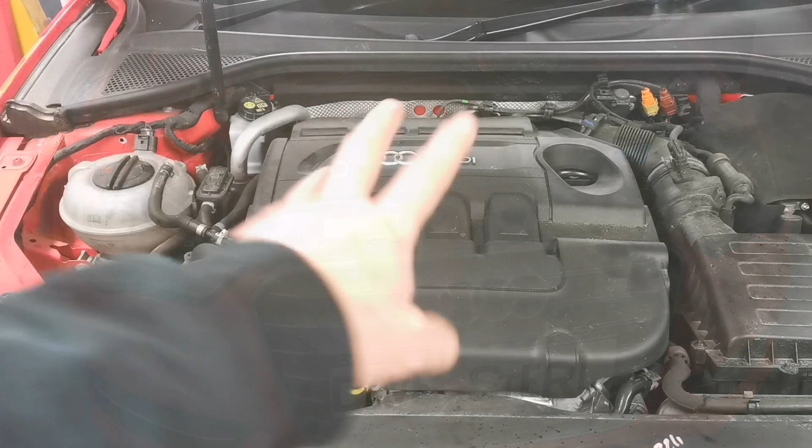2014 Audi 2-litre TDI. And in this video, I'm going to talk about the cooling system in these engines. And this is going to be the advice that I give all my customers with Volkswagen Group TDI engines and how it could save them a ton of money and a lot of hassle.

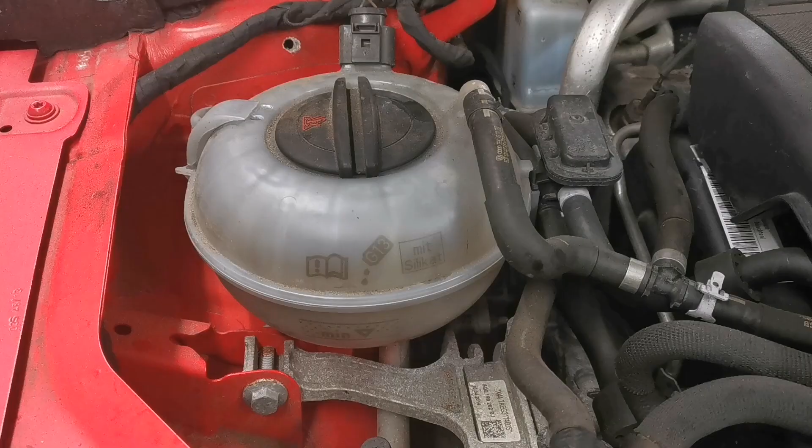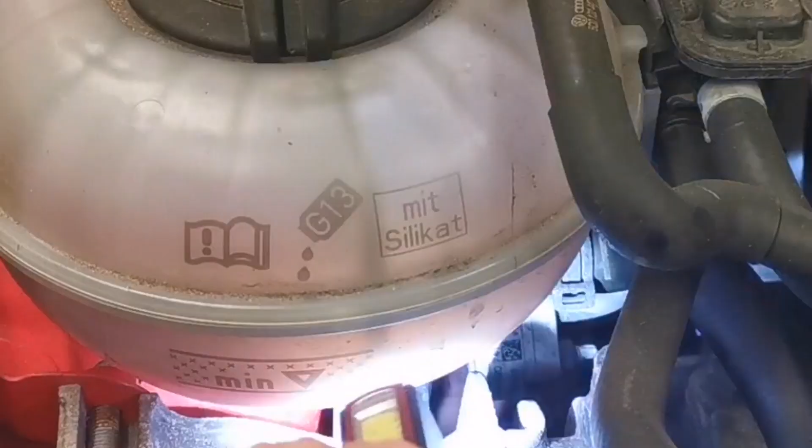So this particular engine in this car has this expansion bottle, and as we can see, there's a couple of German words written on it there. Mit Silikat, and that translated from German basically means with silica. So what that means is there is an additional bag of silica in this expansion bottle. Now I've already taken it out so that I can show you what it looks like and show you what to look for. What I tell customers, and I'd strongly advise them, is you remove that silica bag.

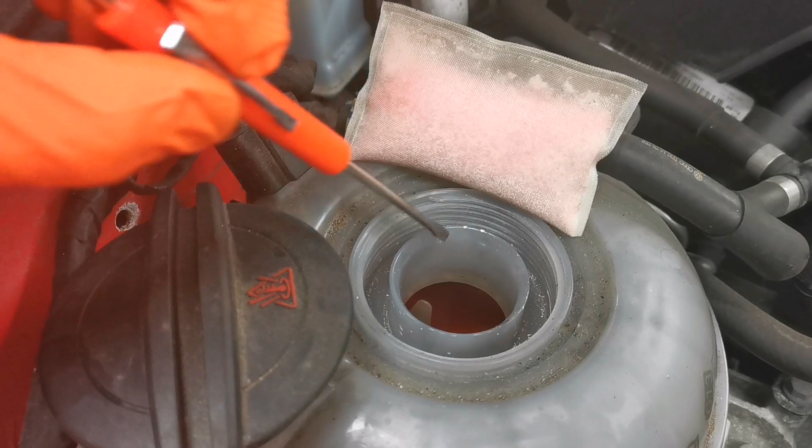So there it is. There is the silica bag that was inside this bottle. So where it usually sits is into the right hand side, so it's sort of in there. If you look in, you can see this is the level sensor, and you see two wee prongs, but in there, into the right hand side, you can see the corners of this wee bag here, and this is full of silica gel. So with a hook tool and a pair of long nose pliers, you can get this bag out of here.

Now, it is quite sort of rigid. It's like a nylon bag there, with the silica granules in it. So what they're doing here, as you saw on the bottle, it said G13. So the G13 coolant that's in these cars is an environmentally friendly, low emissions coolant, and there isn't enough silica in it. So this is a silica additive that they've put into the reservoir there.

So yeah, you can see it. This has been out a wee while and it's dried off now. So obviously when you pull this out, it'll be all wet, and you can just about get it out from the hole there without having to disconnect any hoses or anything. So obviously, if you're going to do that, you want to take care. You don't want to rip this.

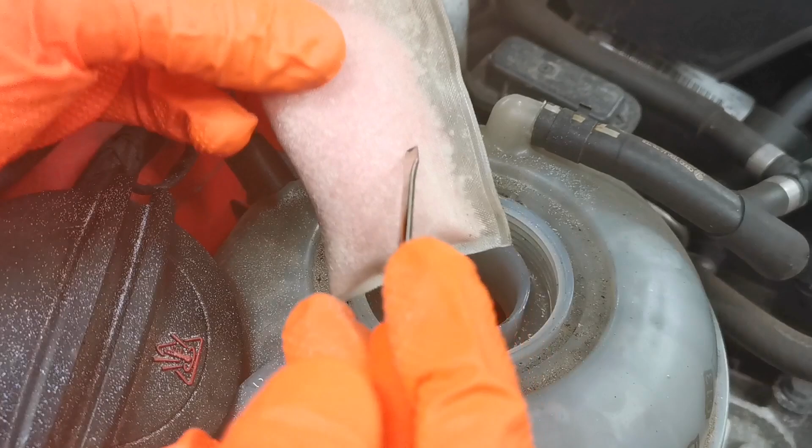If you find that this bag has punctured, and we have had occasions where we've found that this bag is split, these silica granules mix in with the coolant and they dissolve in the coolant. And why we want to remove this bag is that if that silica gets in with the coolant and the bag is split, that basically blocks up the coolant system, and you have a hell of a problem getting that flushed out. And it's a real pain. So much so, Volkswagen Group actually sell a flushing machine for this very problem.

So okay, why do I have additional silica in it in the first place? As I said, it's because the G13 is an environmentally friendly coolant which doesn't have enough silica in it. So they put this additive into it to help that, and there are other reasons as well. So this particular engine is a CRB engine there.

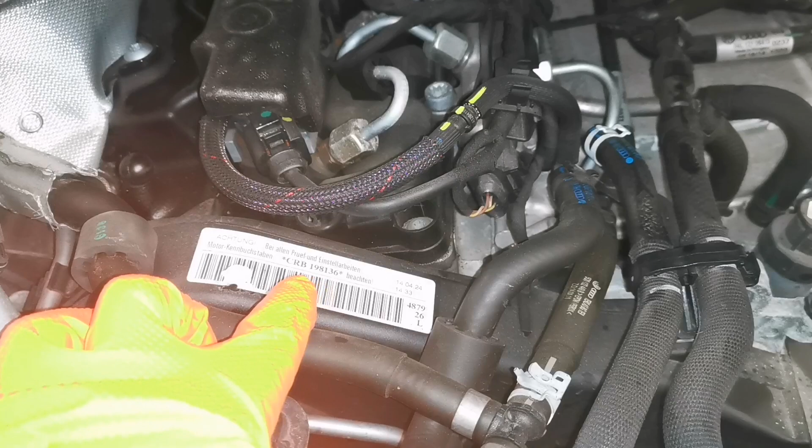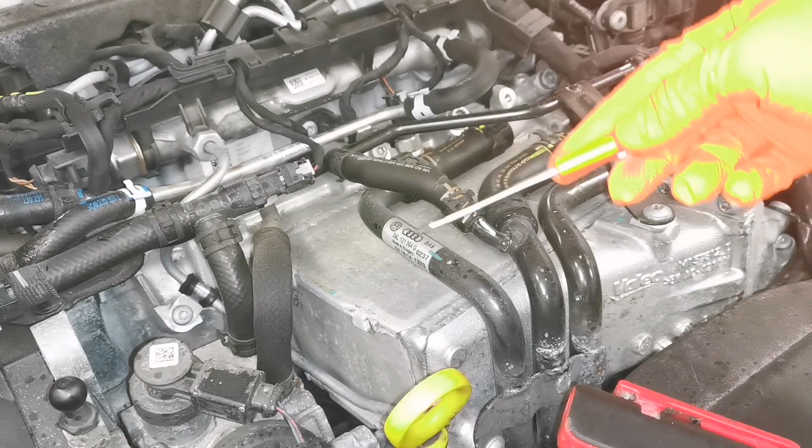So the water pump is driven from the timing belt, and I'll just get that engine cover out of the way there. And what we can see over here in the top corner is there's an awful lot of aluminium about this engine. This particular engine has a massive big block of aluminium as the intake manifold, and that's cooled with all these coolant pipes. So it's a very elaborate cooling system. There is the mechanical water pump that is driven off the timing belt, and there are also an additional 2 electric pumps.

Now, I've done a video in the past where I've shown the schematic of that system and the complexity of it. So the idea is it gets up the temperature very quickly. There are other factors. There is an electric heater in it as well, which I'm going to show you. And we'll talk a wee bit more about the coolant system. This vehicle here has a switchable water pump, and we'll show you how you can identify that.

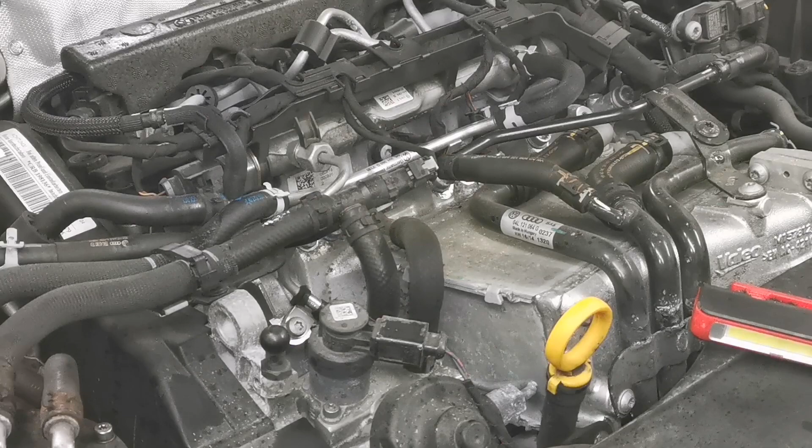So having a wee look around this engine bay, you can sort of tell what you have without having to look up engine codes or anything like that. So these engines that tend to have a lot of aluminium components tend to have the G13 with the additional silica bag. Now, I'm saying to remove that silica bag because there is a serious risk of that bag deteriorating and splitting, and that basically blocks the coolant system up.

And the first sign of that usually is the heater matrix in the cabin. You get no heat from it, and we're going to talk a wee bit more about that as well. But the first sign of that is no heat in the cabin, heater matrix is blocked. And if you go ahead and just put a new heater matrix in it, it's going to block up again.

If this bag here is split, your coolant system is contaminated. So G13, I'm basically going to read a comment that I made on a previous video, and I have it here. G13 is glycerin based, made from biodiesel, environmentally friendly. The traditional G12 is ethylene glycol. The G13 has silica additives in it to prevent corrosion to aluminium radiators, etc.

And I wrote there, my understanding is additional silica bag if the car has extensive aluminium, i.e. intakes, etc. G12 and G13 are miscible, but the long life aspect and corrosion protection are reduced. So what I'm saying there is if you revert to G12 and put G12 in this, it's not as long lasting and clearly not as environmentally friendly and emissions friendly as the G13.

So I just took a screenshot of that comment I made on a video 10 months ago. That was Russell Duncan, and that was my reply. And we'll just get that out of the way, and as you notice, every time I handle that silica bag, I put gloves on, because silica is poisonous. Coolant is poisonous in itself, but you get that stuff in your fingernails, and it's really nasty.

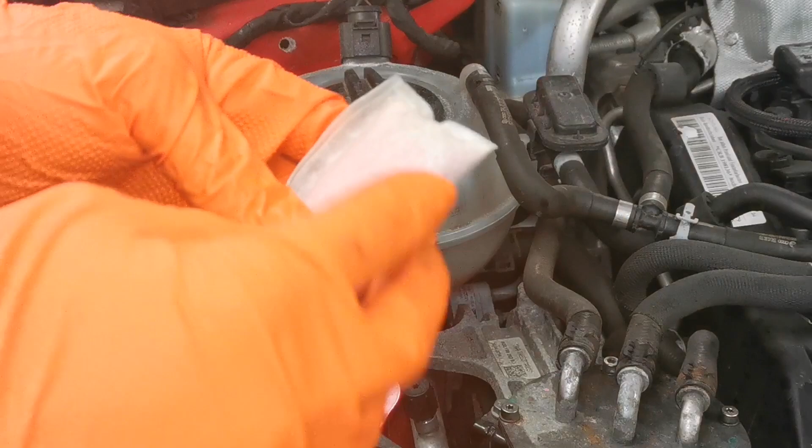Now, just to clarify, if it does not say mit Silikat on the bottle, I would go as far as to say you will not have this tea bag thing inside this bottle. It's only if you have that writing on it, but you could well have G13 in it. As long as that bag isn't in it, you're okay. Just keep the G13 in it and you're grand. So you can have G13 with no additional bag. I've seen that loads of times as well.

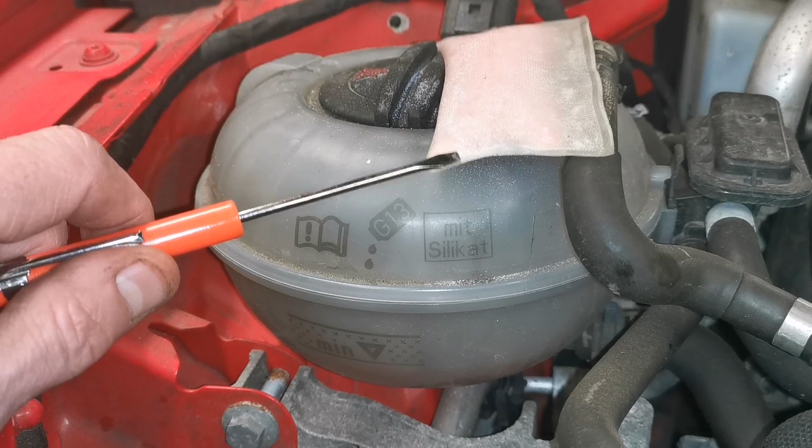But if you see this badge here, mit Silikat, written on this expansion bottle, my advice is to very gingerly take this bag out. Extract it through the top hole there, and as you can see, it's perforated. It's like a big tea bag. So I'm okay with running this car with the G13 in it, and as you can see, it needs a bit of a top up. I will be topping this up with G12 because the G12 and the G13 are miscible, which is a fancy word which just means mixable.

Of course, this is not what Volkswagen Group tell you to do. This is just my opinion. You can change this back to G12 if you want, and of course you can keep that bag in it if it's your preference. However, my logic is that the consequences of this system failing are a lot less with this bag not there. So keeping the G13, I'm quite happy to do that.

It's a perfectly plausible question from Russell there, of course. Should we keep the G13? Should we revert back to G12 when we remove the bag? That's your preference, basically. At the end of the day, I'm okay with keeping the G13 in it. But what I'm doing here is weighing up the risk of severe, expensive repairs over keeping that thing in there, knowing that it gives these serious problems. So weigh it up between having a real disaster on your hands with this cooling system and just running it with G13. It's sort of up to yourself. I'm just telling you what I think.

I've also done a few videos on the channel, and you can look through the channel list if you want. This is a switchable water pump, and yes, it creates a lot of questions and comments about the cooling system. This is the dreaded switchable water pump. It's driven off the back of the timing belt, so there's no teeth there, it's off the flat side of the timing belt. And this sleeve then goes over the impeller and basically switches the pump off.

Now it still spins, it still rotates off the timing belt, but because this sleeve is over the impeller, it does not force the coolant around it. Now, because this is quite a complicated cooling system, and as I said, it has two electric pumps as well.

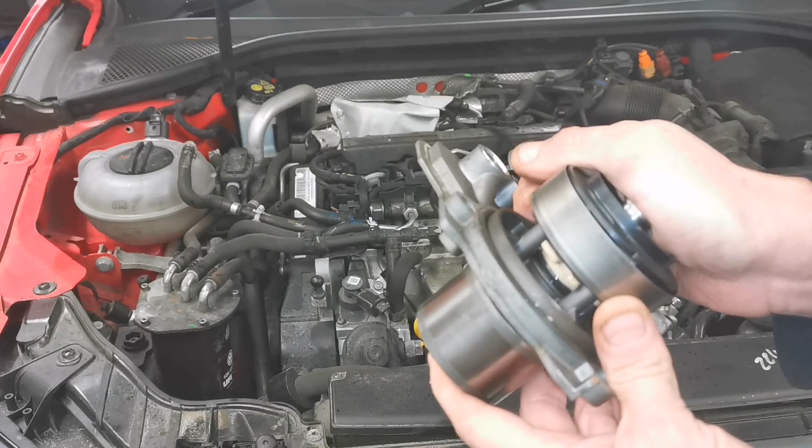You know, an overheat condition doesn't really manifest itself, and the typical symptom of this sleeve sticking, which this just sticks firmly. I've freed this sleeve up, but this was a failed unit. So when I got this at first, this thing was jammed solid, and it took a lot of WD-40 and a lot of putting air pressure in there to get this thing to chooch and free up. So it works now all right, but there's no way that I'm going to put that in the car.

But anyway, the symptom of this sleeve sticking is that when you're driving along the motorway, when you're in sort of cruise mode and you're driving at like 70 miles an hour, the temperature gauge raises way up, and you get an overheat condition. It goes above the normal sort of 12 o'clock or 90 degree centigrade normal temperature condition.

So how can anybody tell that they have one of these switchable water pumps in this car? Now this particular one, there's a piece missing here because it's swapped over onto the original car that this came off. It's not off this car. And this particular one, there's a multi-plug, a wire connector goes onto here, which actuates this, and that goes off the back and is underneath the inlet manifold.

In this particular car, the car that this pump came off, it had a plastic, normal sort of style inlet manifold there, and not this big elaborate aluminium thing. But in this, because this is a 2 litre, we can tell very, very easily if this engine here has a switchable water pump.

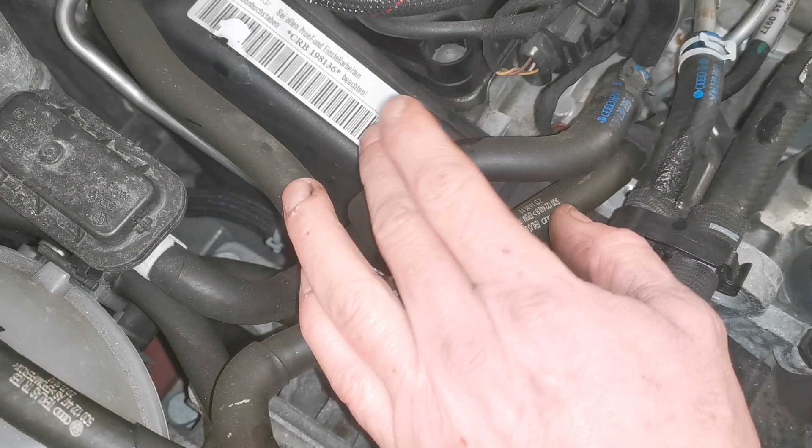If we look to the rear of the timing belt cover, so that's the timing belt cover there, we see this brown plug, and that is the connection for the switchable water pump, which is in here. So if you see that brown plug, you know you've got a switchable water pump in this thing. And that's it, just a different angle there. That's it in there underneath this. There's the diesel return pipe here, or one of them, and there's that brown plug there.

So that's your timing belt casing. So the timing belt sits down in here, or the water pump will sit around this area here, down in there, and that's the connection to it that makes that sleeve go in and out.

Okay, moving on, and I'm going to talk about the opposite condition, not an overheat condition, and these are comments and questions that come from some of the thermostat videos that I have already shown on the channel. And this is a bit of information which comes from Volkswagen Audi themselves, and this pertains to if you have the condition where the car takes a long time to get up to temperature, and then when people are driving along, or they go down a hill, or they're just traveling along fairly slowly, and it's a cold day, the temperature gauge actually drops off and sort of fluctuates and moves about.

Now, this could be quite important. Most people would say, oh, you have a faulty thermostat. Your thermostat's stuck open, and the engine can't regulate the temperature and keep it stable. Well, this is a piece of information which is, in my opinion, like gold dust if you own one of these TDI engines. And here it is. I'm going to share it with you because I don't think this information is really that readily available. And here we are, and we'll try and get it in the shot for you.

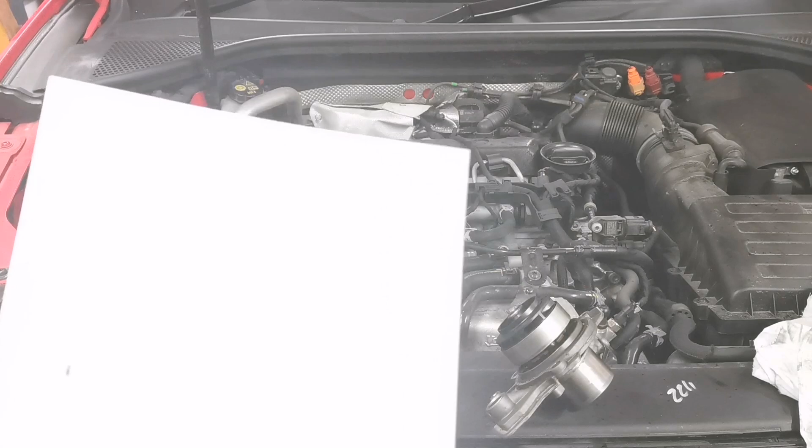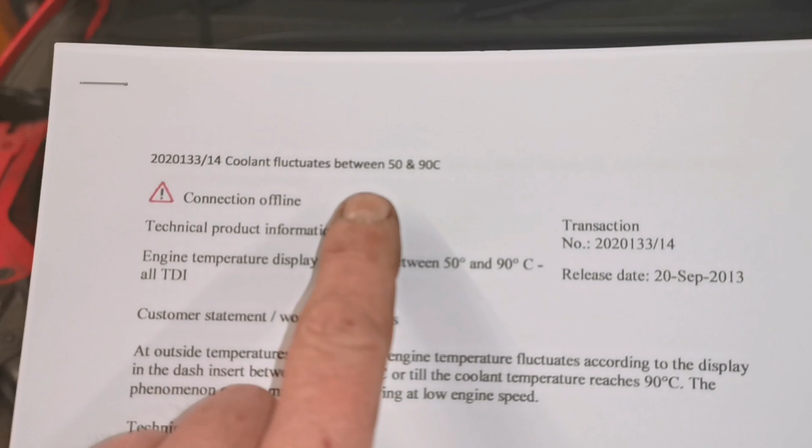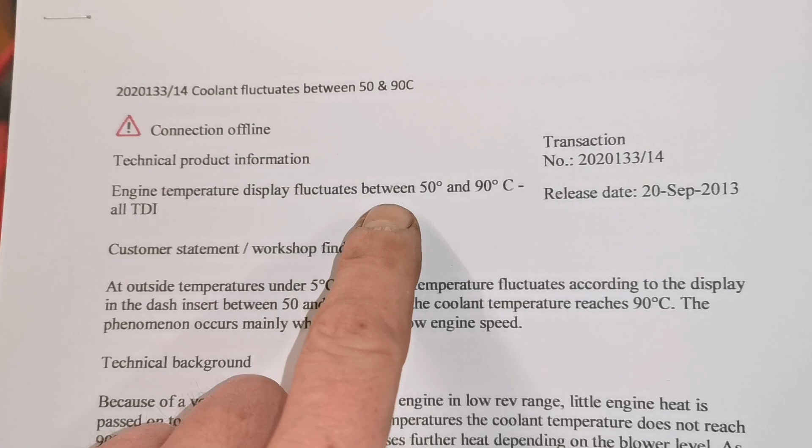So here we go. Customer complaint: coolant fluctuates between 50 and 90 degrees centigrade. Technical product information. Engine temperature display fluctuates between 50 and 90 degrees centigrade, all TDIs. So customer statement is at outside temperatures under 5 degrees centigrade.

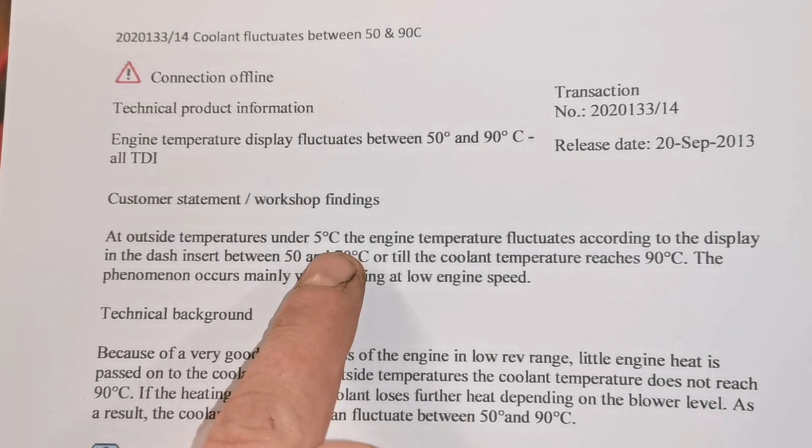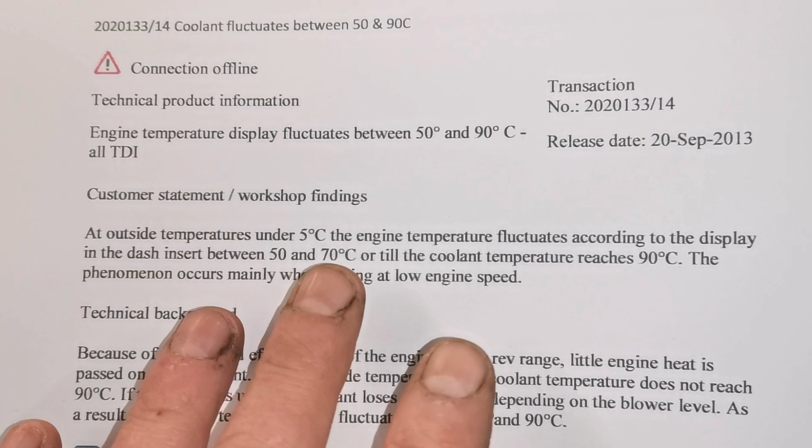So I'm getting asked this because it is winter time, and some parts of the United Kingdom have sub-zero temperatures at the minute, and it rarely gets anywhere near the 5 degrees. So people are seeing this, and I'm being asked about this. So this is the reason why I'm doing this video.

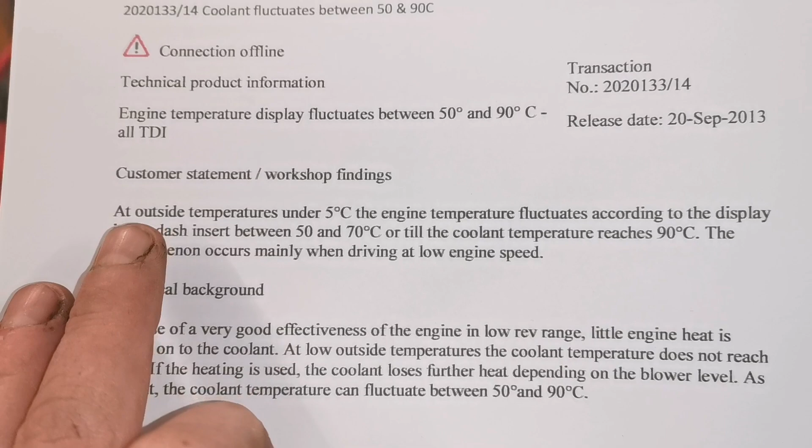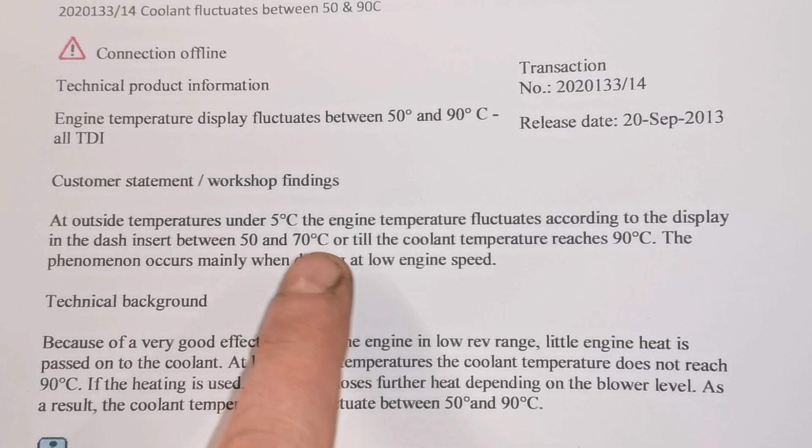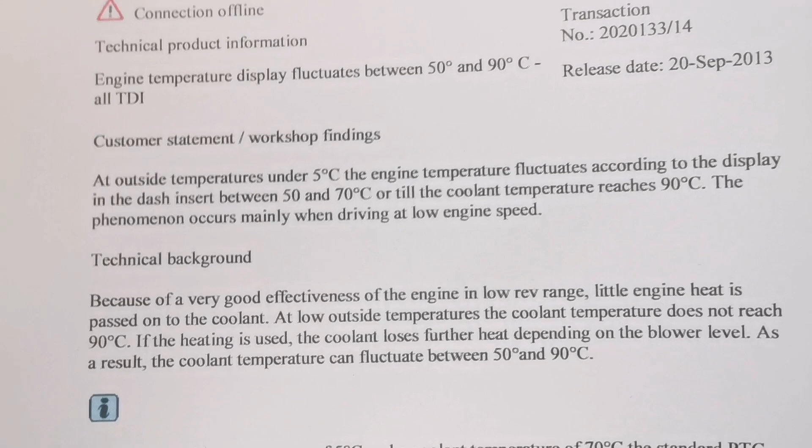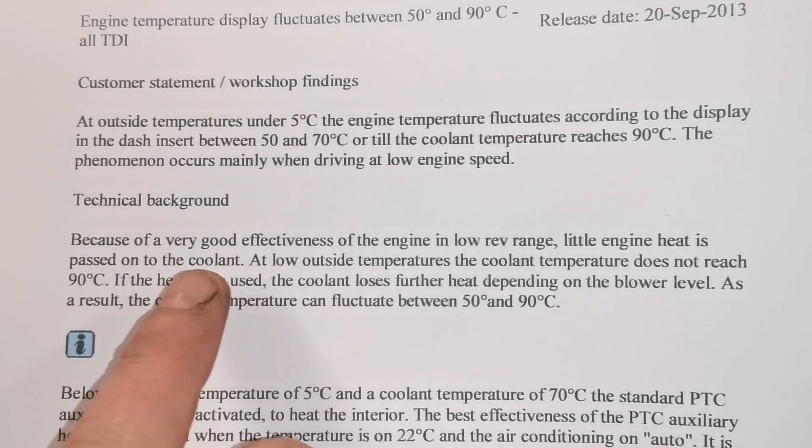At outside temperatures under 5 degrees centigrade, the engine temperature fluctuates according to the display in the dash between 50 and 70 degrees centigrade, or till the coolant temperature reaches 90 degrees centigrade. The phenomenon occurs mainly when driving at low engine speed. So here we go. Technical background. Because the engine's brilliant in a low rev range, little engine heat is passed on to the coolant. At low outside temperatures, the coolant temperature does not reach 90 degrees centigrade.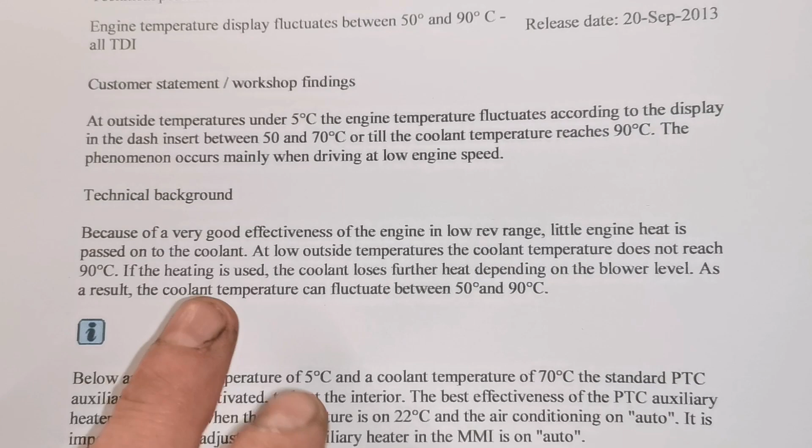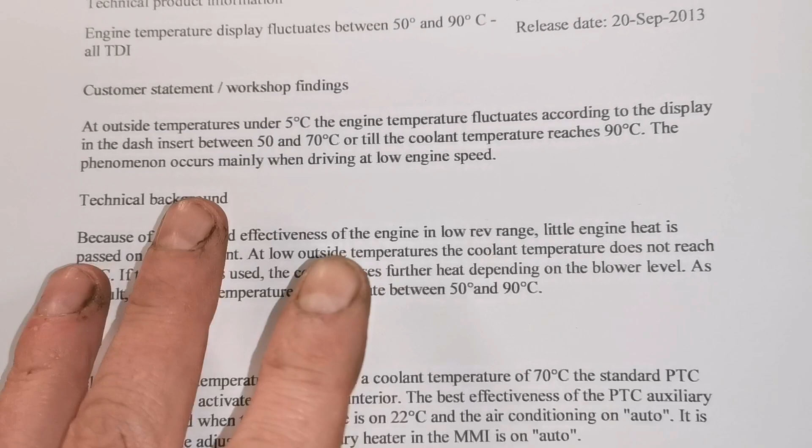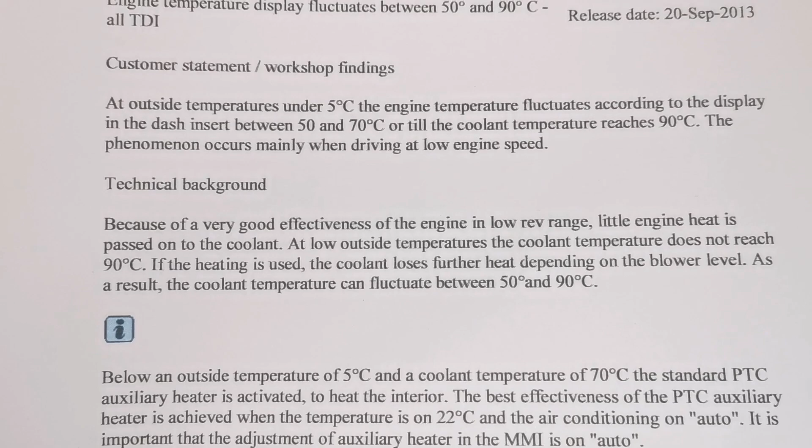If the heating is used, so that's the heating in the cabin, the coolant loses further heat depending on the blower level. So if you have the blower on full blast to demist the windows or whatever, it just saps the heat out of the coolant. So the heater matrix then acts as a radiator. Well, it is a radiator, so it cools it down. So as a result, the coolant temperature can fluctuate between 50 and 90 degrees. And here's the thing. Let me see.

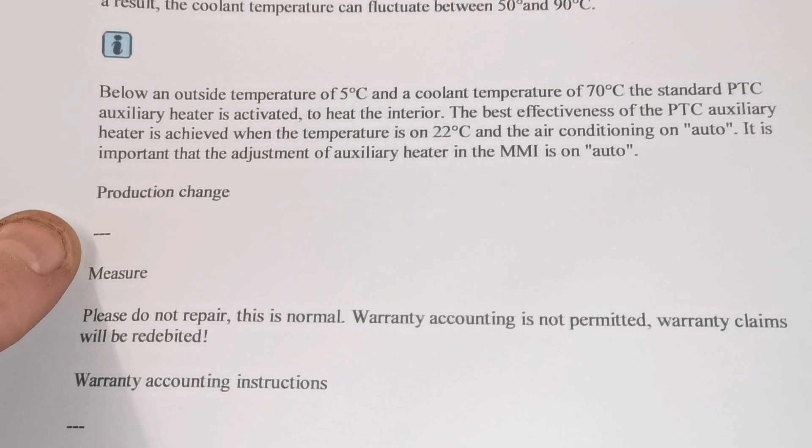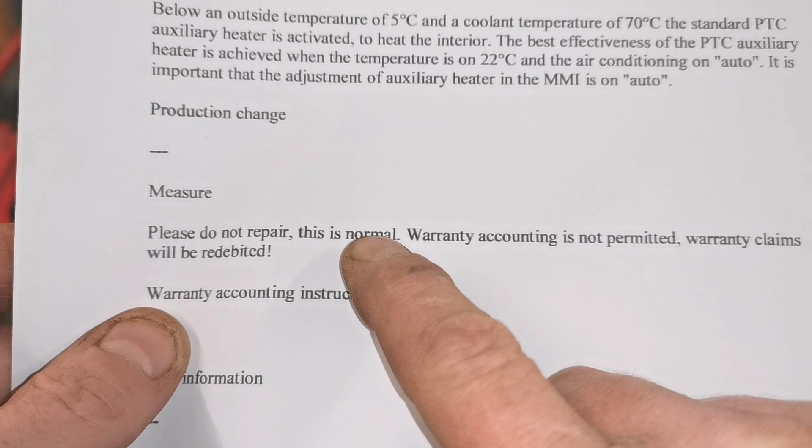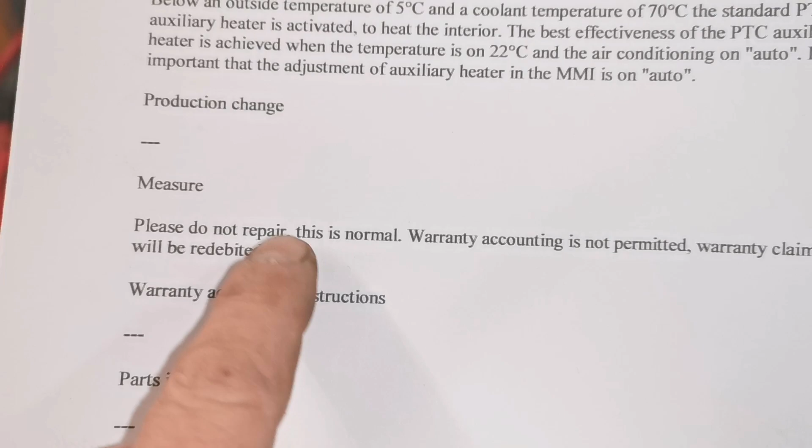Okay, measure. Do not repair. This is normal. Warranty accounting is not permitted. Warranty claims will be redebited if you put a thermostat in that engine. So there we go. This is normal, right? So I'm going to talk a wee bit more about what this paragraph means, and I'm going to show you

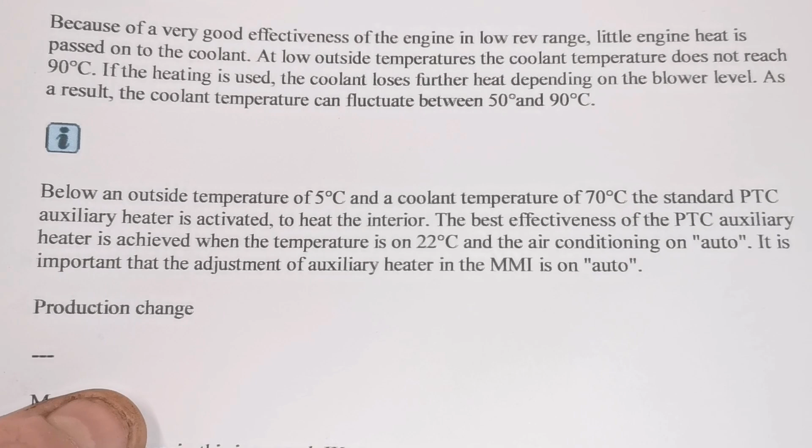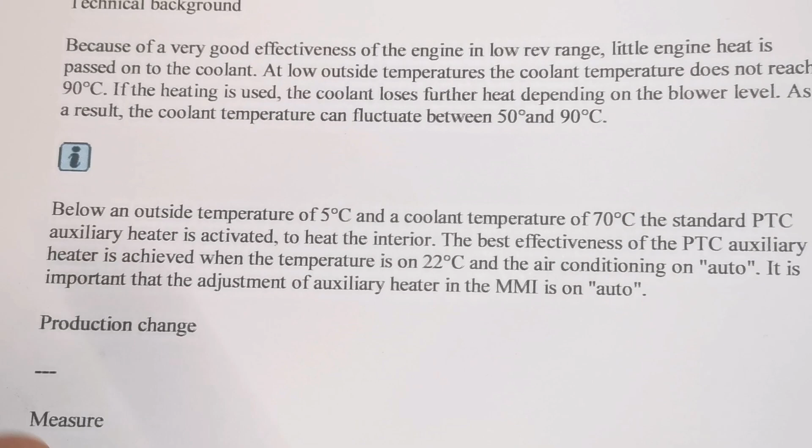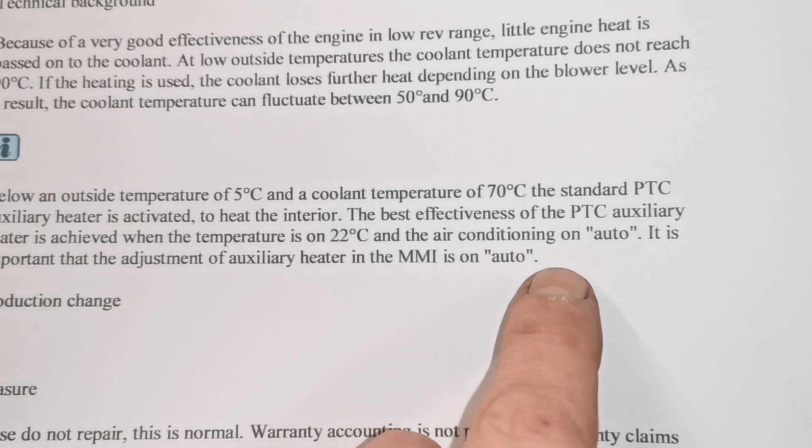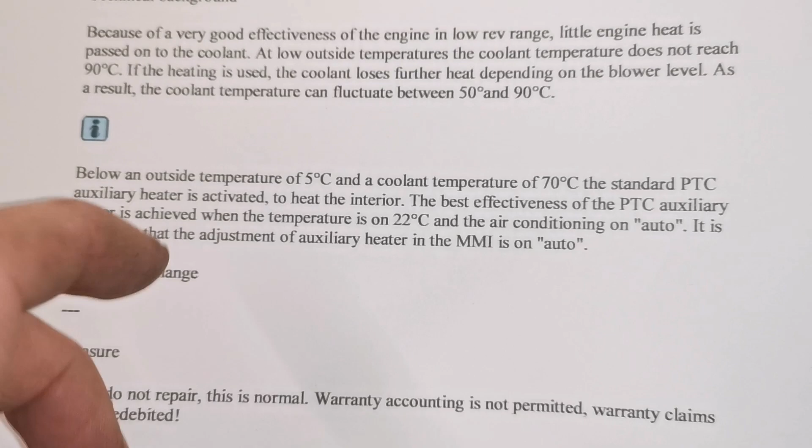something else as well. So below an outside temperature of 5 degrees centigrade and a coolant temperature of 70 degrees centigrade, the standard PTC auxiliary heater is activated to heat the interior. The best effectiveness of the PTC auxiliary heater is achieved when the temperature is on 22 degrees and the air conditioning is on auto. It is important that the adjustment of the auxiliary heater in the MMI, that's multimedia interface, you know the thing that pops up out of the dashboard, and you have a dial that turns the radio and stuff, changes the channels, is on auto.

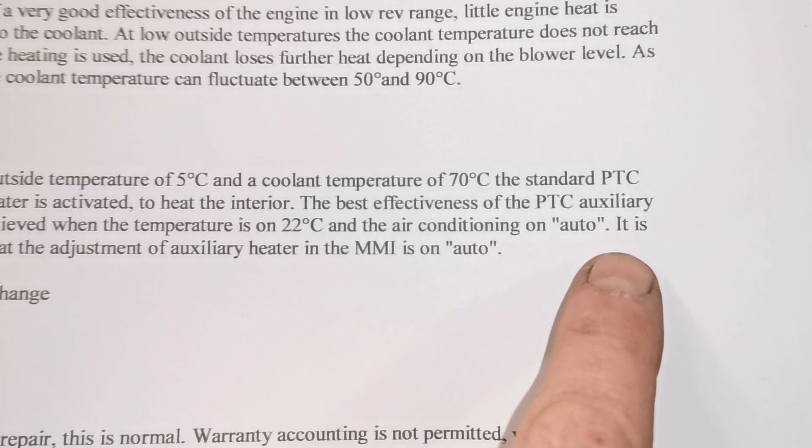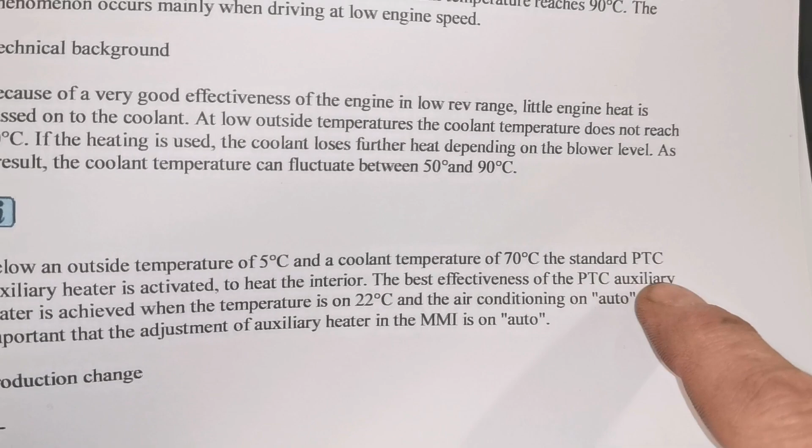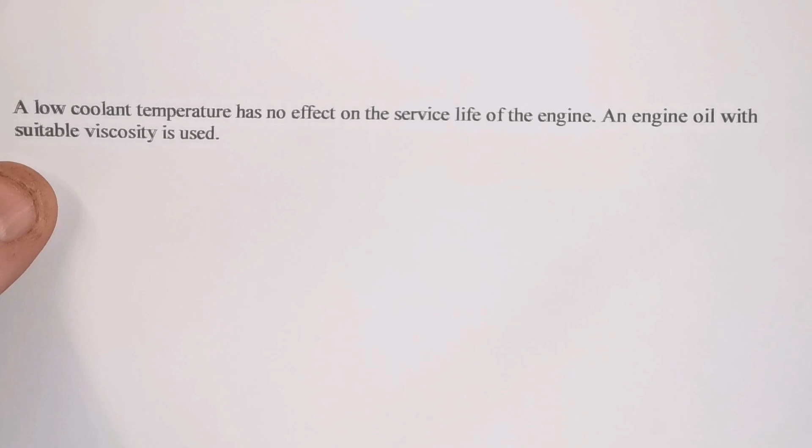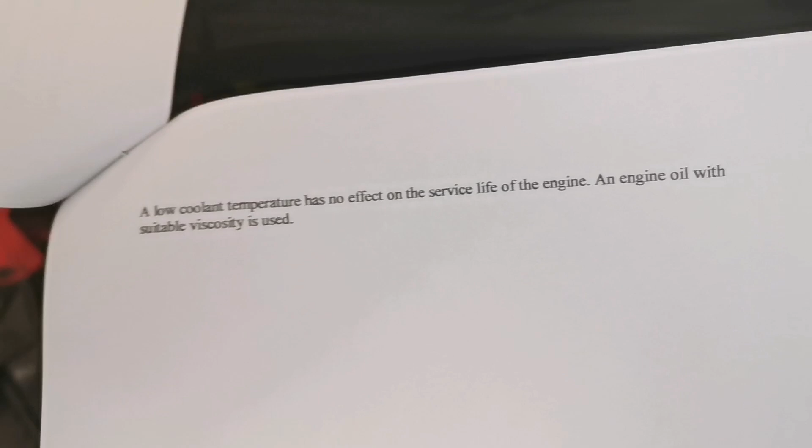So you have that on auto in the multimedia interface, and this PTC positive temperature coefficient auxiliary heater then comes on and actually heats the cabin. So we'll just show you what this auxiliary heater looks like and what it is and what it does. And before I do that, there's just one wee final thing here. A low coolant temperature has no effect on the service life of the engine. An engine oil with suitable viscosity is used. So they're saying there that has no ill effect at all. So if the ambient temperature is below 5 degrees, your coolant temperature will fluctuate, and that is normal.

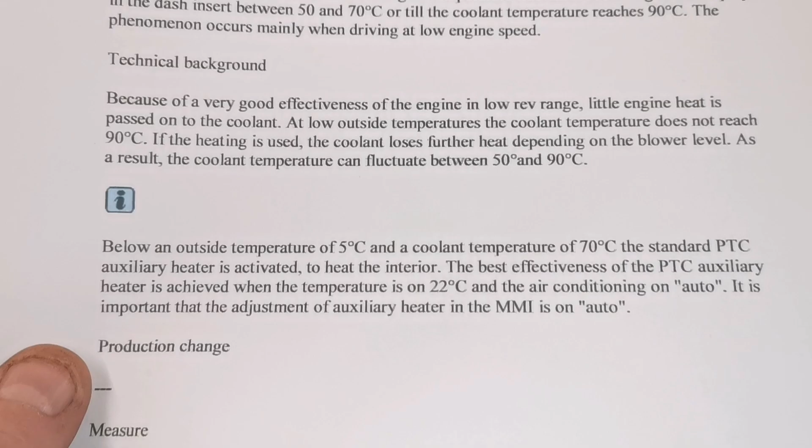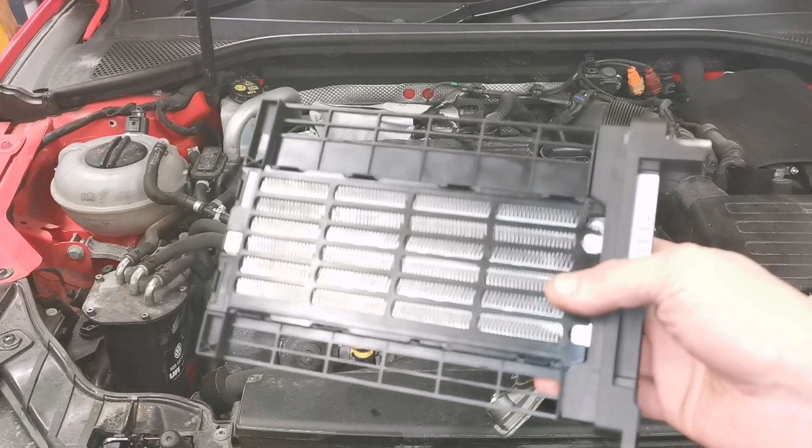So a PTC auxiliary heater, what is that? And probably most people don't even realize that they have one. And well, there's it there. That's out of this car. So there's going to be a video on this thing here. So this is basically an electric heater. So there's a few connections in there, and that's the earth stud for it. And that is basically a 1 kilowatt bar heater that is heated from the battery. Now this only comes on under certain conditions. You know, the voltage has to be good, start stop has to be off, it has to be, I think it's under 5 degrees, stuff like that, and it has to be switched on in the multimedia interface.

So what this thing does is when the car is cold and the coolant isn't hot and you're calling in the cabin to demist your windows or something like that, it'll turn this on, so you get warm air basically coming out of your vents. So this sits behind the normal heater matrix. So if you imagine the normal heater matrix sits here in front of us where my hand is, this sits behind it, and the air flows through it and through this here as well.

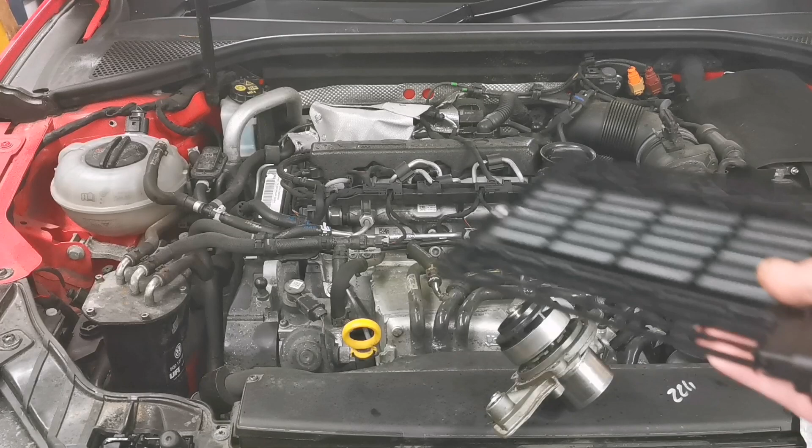So that is in addition to an electric water pump, which pumps the engine coolant through the heater matrix in the cabin, independently from the main water pump, which is this thing, and that's in the engine. It also has another water pump, by the way, that pumps coolant through the intercooler. So there's a lot going on with these coolant systems in these modern TDIs. As I said at the start of the video, this is a 2014 model year car. I'm just using these components to show what's going on here. Maybe a lot of people don't realize they even have this, and actually what is going on.

So hopefully that answers a lot of questions. It's not just questions that I get in the comments. My customers ask me these questions, especially the one with the temperature gauge going down on them, and they think there's something wrong with the thermostat or whatever, and I show them that document and tell them that is normal, and they go away more than happy because I've saved them a load of money and saved them changing parts unnecessarily. And I like to consider myself one of the more honest people out there, and that's why I'm sharing this information with you. It's not a repair video, but hopefully it saves you from doing unnecessary repairs. That's the idea of this video.